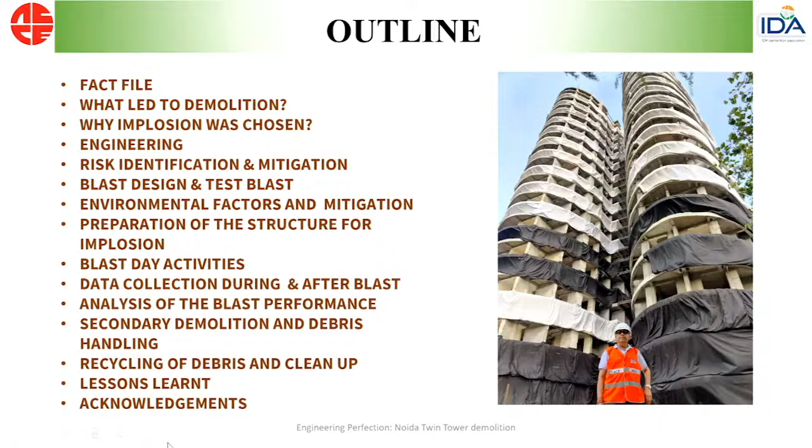This is a very critical part of our approach to demolish it - the way to prepare the building, data collection during and after the blast. This is interesting - what data we collected and how it was done.

As a consultant, how much do you give the market? But I made some critical review analysis. You're going to take away some secrets - data collection and analysis of the blast performance.

And clean up - this is important because we created a mess, and what as engineers we need to do, and acknowledgement of course. That's just to check if it works.

Know the history of this - read as we read through, as I show. These are the two towers we are talking about, which here it says tower 16 and 17.

Apex and Ceyane were the names given. The main reason why the Supreme Court gave the order - mind you, all of these buildings are under the same developer. They filed the case in 2009, somewhere it's there, floors which were not in the original plan.

These were given sanction from 15 to 20, 20 to 30, 30 to 40 floors, mostly from government organizations who promised, and they thought they'll have a good outcome. These two towers were unauthorized, but there was accusation.

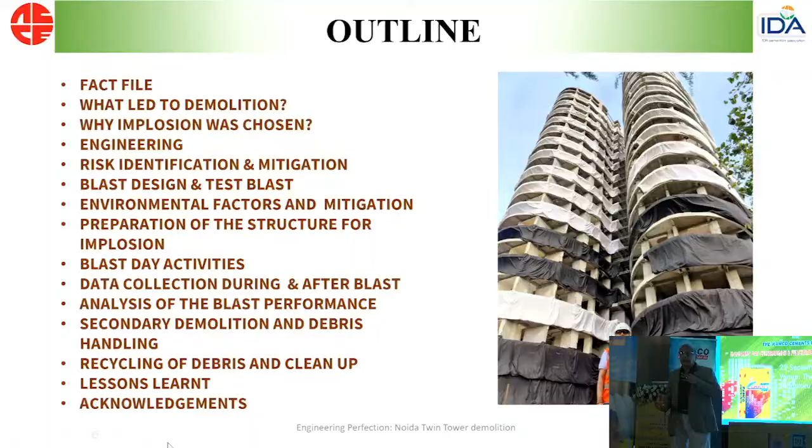A lot of them died during this 2009 to 2021 journey - they were all retired, so a lot of those who fought were no more to see the victory. You can read the other two.

So this is a clear case of the association putting their foot down and saying what was not sanctioned in the initial plan, you cannot build. So this is what the case was all about.

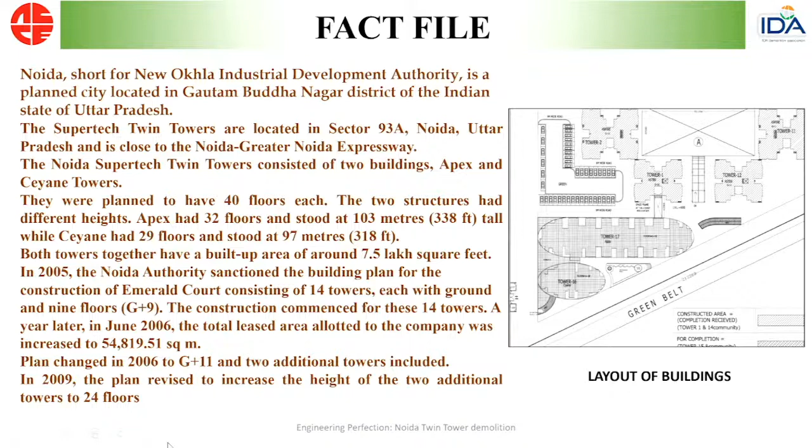In 2012, you can see the numbers, our flats were booked, advances taken, and all of them got their money back with interest. So in 2021 August, nearly a year ago, the ruling was given, and it was obviously fought by the developers. It was fought, but they took notes.

It is your job to get it done also. So in August, a very clear Supreme Court ruling was given to the Noida authorities. They mentioned that whatever method is chosen for demolition, do it in any method you want, but within the time frame.

So that's how I was involved. In the last paragraph, you can see that an agency has to get it done and get it approved by Edifice and CBRI. There was a team where others did not have demolition expertise. Edifice Engineering was the contractor, a company in Mumbai, and the Supreme Court was involved in giving the ruling, and they put their foot down that it has to be done.

Again, I had to justify, go to the site, see the progress and all the difficulties they have faced. I'm going to explain why the extension of time for this contract was also given by the Supreme Court, and it was executed. This was the main team in the beginning.

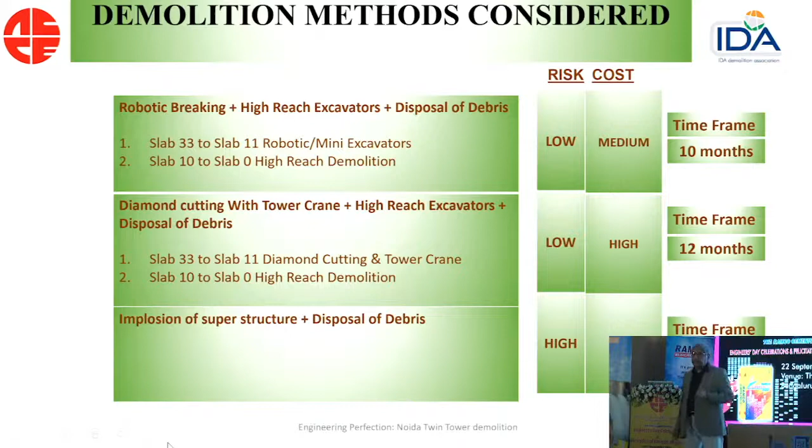Now, when it comes to this, what are the options for demolition? It has to be done by this date, and whether it's doable, there were three choices here, and then you can look at the level of cost, time, and risk. These are the three vectors, because this is a 100-meter building, and we need almost double of what we will use, and beyond this it stopped.

So the first method, from top down, very low risk. Once you hoist the machines to the top, and you're working from the topmost floor. So that was not a problem.

That's a slow process, and the third method was using explosives to implode the building, given the amount of work involved. This requires a lot of experience with this kind of building in India. So last year, after a lot of deliberations, this method was chosen.

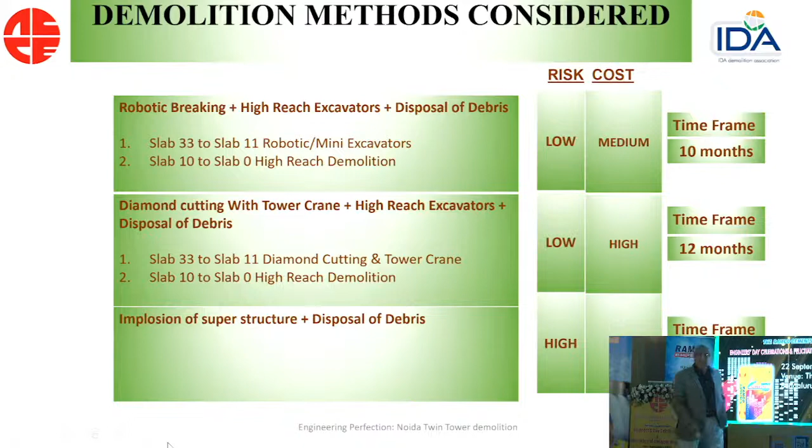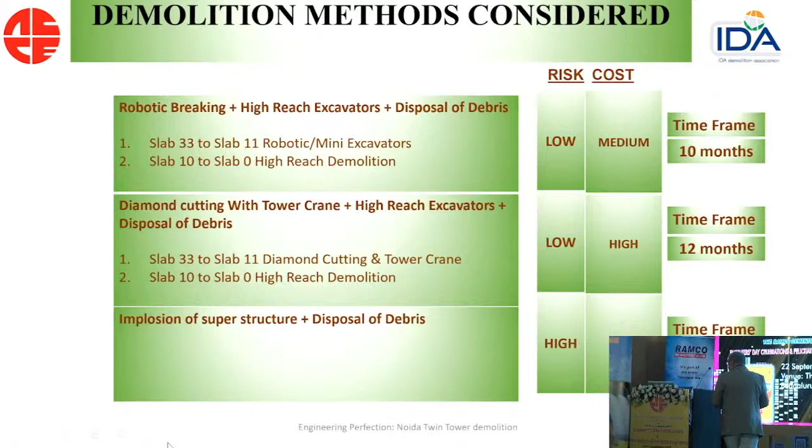And that is the reason we brought Jet Demolition, because they are experts in explosive demolition. So my contention is, even with the other method, using machines, we can do it, but it will take 3 years.

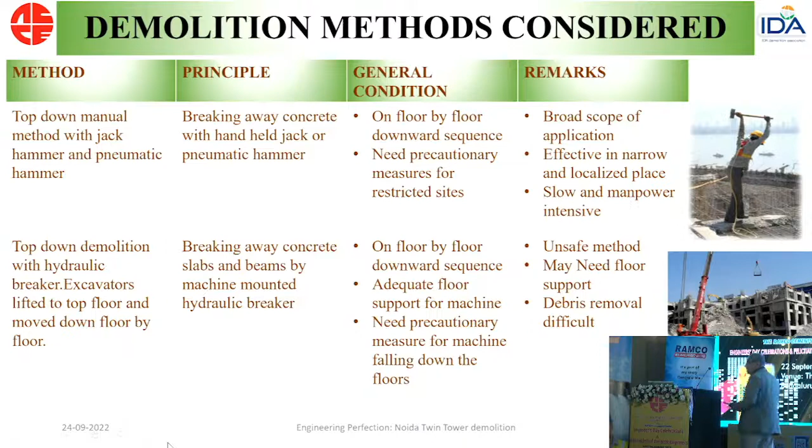Here is a multi-storied building, and if we started demolishing from top down, it's a very risky method, but it could have worked. So we considered some other methods, high reach, tall machines based on excavators, with their pros and cons of cost, time, and risks.

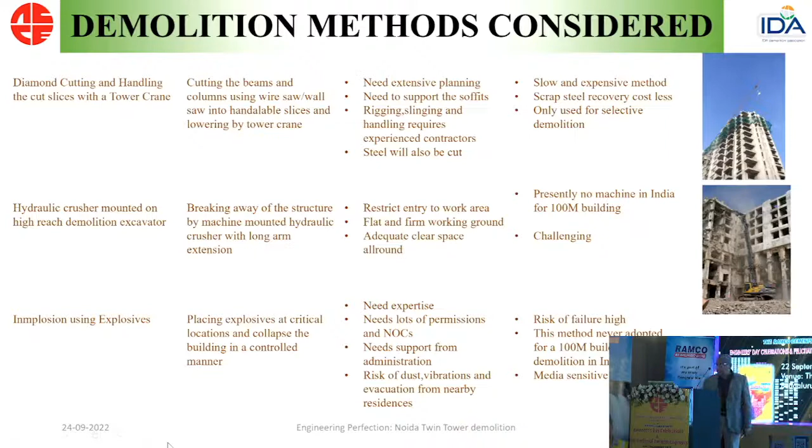And the Noida authorities finalized the bottom line, with both companies, Edifice and Jet Demolition. We had cases where buildings were demolished and had tilted, and the structures failed. You will find hundreds and hundreds of such examples.

So we had done this in Cochin against a Supreme Court order, very successfully. For us, we need gravity, we can't go and do it if we have to displace anybody. There were no families there.

And it's the shortest duration possible, with the capability to check at every stage before the collapse. What about the gas pipeline? I will explain when I show that.

Fast execution, safest and economical. So in the field, at the site, this can be done successfully, without a failure.

This is a do or die situation, no second chance. It always happens in an industrial atmosphere all around, so can we handle this dust? Can it be controlled? There were cases where two people standing far away, 200 meters, 300 meters, got hit and were killed.

So we have to make sure that this doesn't happen. People are always watching, and somebody wants to go very near with his mobile camera. If he is hit, we are finished.

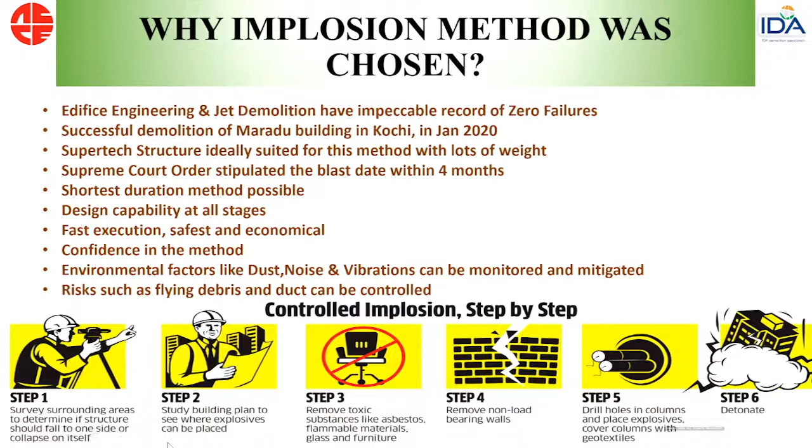So this kind of risk is a media connected event. Now come to a chapter which none of you will know about. Just like any other design, like structural design, doing finite element analysis, doing modal analysis, taking material properties, it's exactly the same process we do, but in a very short timeframe.

The basic principle of the implosion is based on various theories of structural collapse due to earthquake. Especially if you look at stilt column buildings, the stilt columns get weakened, and this is exactly what we will do, then we blast the columns and weaken the building.

Because otherwise they will not let it happen. So the implosion design called for selecting columns, selecting the floors, and selecting the columns in that floor, which is very difficult. So this is the tower I will explain - this is one of the towers, where these are the primary blast floors.

In this secondary blast floors, the last basement we did not touch. No, this is the ground floor. This is the first basement.

Up with debris for cushioning, plus these. It is sitting on piles, and we wanted to give a chance for the piles to be reused and not damaged by the fall. So we have blast floors, primary blast floors, secondary blast floors. And these are what are called the impact cushions, which I'll explain later.

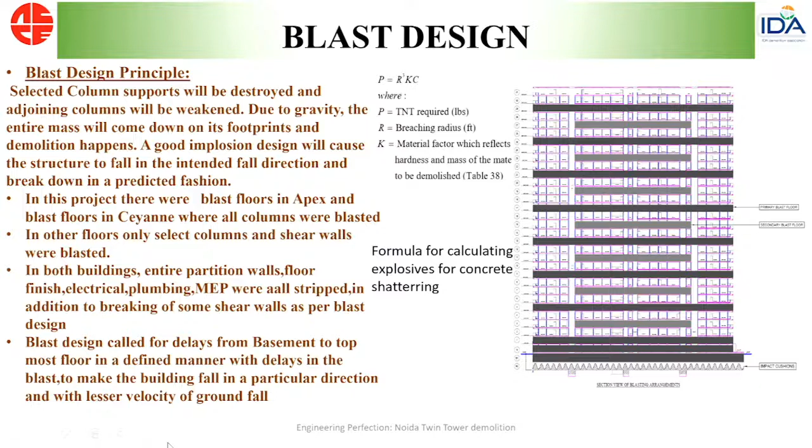So this is the blast design calls for delays from the basement to the particular direction. When I showed you, the first movement has to come. So these are the primary blast floor, secondary blast floor, which I explained to you.

And then we had put steel containers, 20-foot steel empty containers, as a protection. Containers will prevent some damage to buildings. Similarly, this is in the plan.

In this direction is where the blast will happen. So we have to pull this building as it falls in this direction. The columns, it's 0.9 seconds in the 33rd floor.

So this blast design progresses both in the horizontal direction and the vertical direction. But when you see it, you will think it's just one blast between one line to other line. So the blast design calls for effectively blasting in this sequence with a small delay.

From here to here, it's 1 second. So all these things also have a delay. It pulls the building - I know this will be like this.

The debris after it collapses - this is the GAIL pipeline. This is the main road. This is where containers are kept, protection for that building. And this is the footprint of what we and earth berms. This is the gas pipeline.

And GAIL - we had to get clearance from GAIL, NOC from GAIL, because they were running the pipeline and they would not shut it down. It's a pressurized gas line, a main feeder or something, they said. So you can imagine we are blasting near a gas pipeline - how much of involvement and limits of what the API codes are.

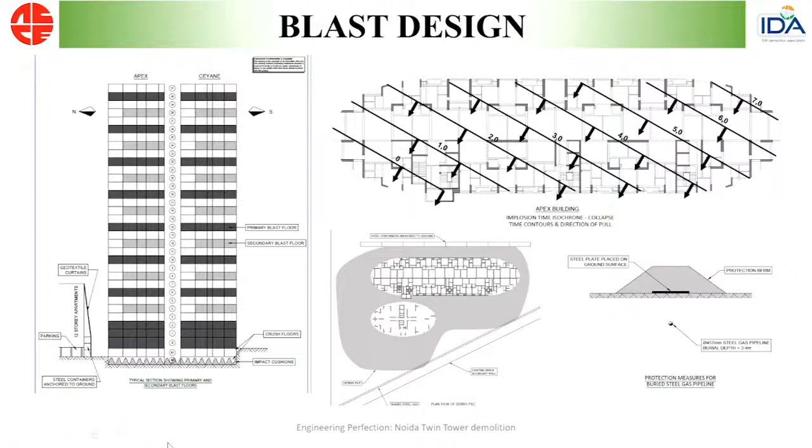They agreed that some protection of this sort would be done, and it was done. And mind you, everything was measured. Every single parameter was measured.

We only touched the shear walls, lift walls and shear walls, almost 20%. Here we are very careful. We had a structural engineer who works with JET, worked with us, and so he had to check after it is weakened. That risk was important for us, that we are going to remove a floor like this.

So these red ones came to me - I'm just showing one, a typical way we approached the engineering science behind this. And it was not just one shot. We went through several iterations and changed these locations to make sure the final stresses on the columns are safe.

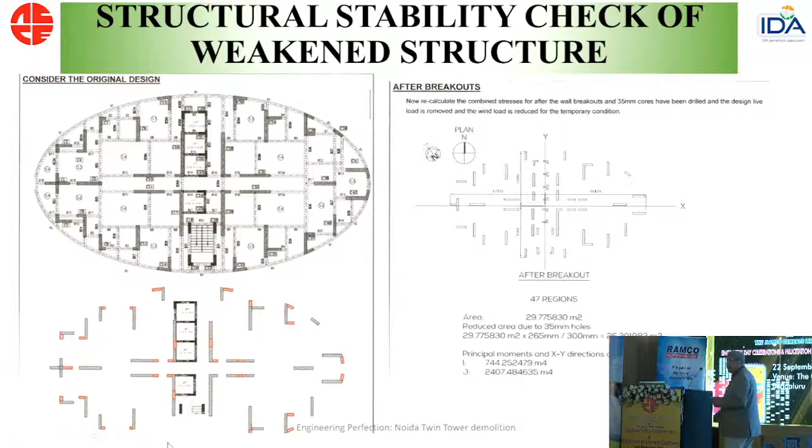And CBRI was our watchdog. They had verified everything.

We had a company from UK who had predicted the vibration levels here. And all of you know that the vibration levels in an RC structure - we can allow up to the peak particle velocity to be 25 mm per second. But this is okay for a normal structure. Here we wanted to make it a little tight, so we allowed only 20.

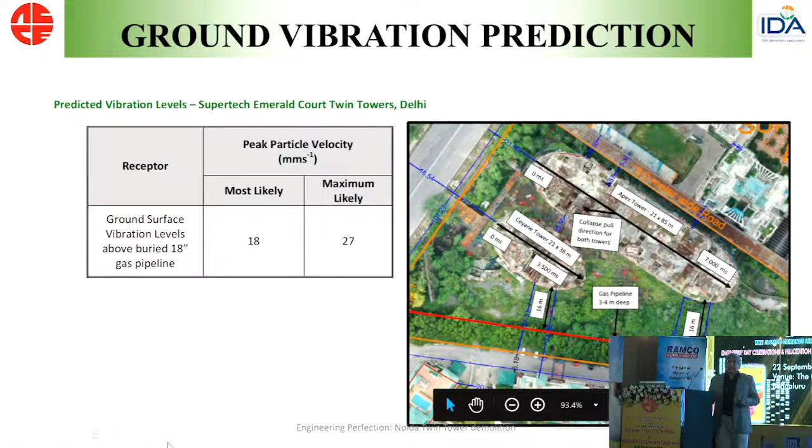And this was predicted before we did the job - it could be 18 to 27. And with the blast, if one blast overlaps the other, the peak particle - the waves, and the stress wave propagation in the soil - and there.

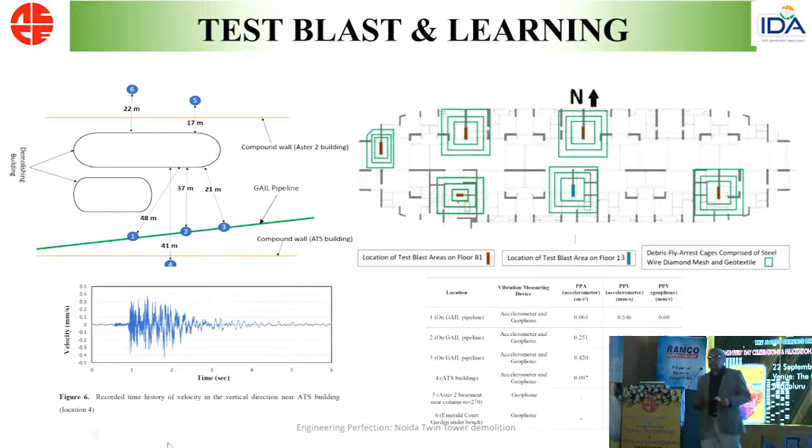So how do we verify all this? This is all theoretical, so in such important projects we do a test blast. Whatever we assumed - the powder factor, the kind of explosives, amount of explosives - based on the basement, column B1, these were basement columns in the existing building, actual blasting.

From the analysis, we knew that removing the five columns at the basement level, loss of support will not harm. So we became daredevils and took the risk of removing those loads, making it zero, to see what happens. We tried this on the 13th floor, and we had also predicted to contain the blast energy. This was projected and done on 6 test columns.

So the test columns were taken, and a test blast was done. Geophones and accelerometers were put to measure the vibration - to measure whether it will work or not was the test for us, on an actual building.

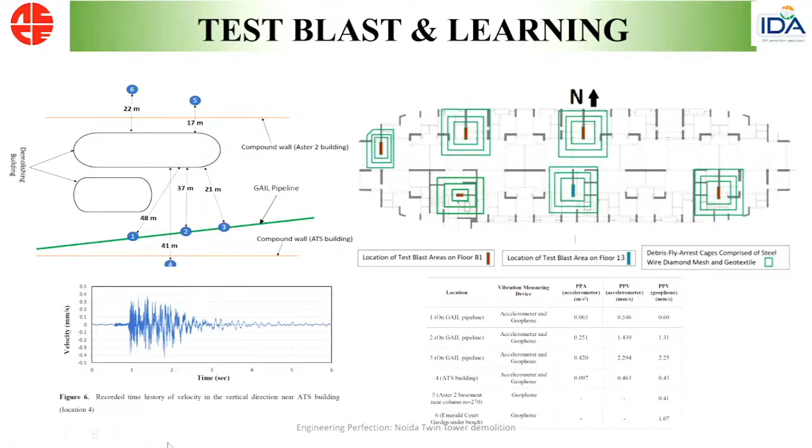And we got the results here. This is the actual vibration record near the ATS building - results on the vertical velocity. Accelerometers and geophones were used, both vertical and horizontal.

So the biggest data for us was vibration - okay, it's an external factor, but the biggest factor is the actual columns. This is the basement column, we have to increase it, and the level - I welcome you to read this while I talk.

Here is the result of the test blast. Before the test blast, we had 8,300 holes. After the blast analysis, it became close to 10,000 holes to be drilled - a 19% increase. Total meters for holding the debris, not flying out, increased by 50%. The number of primary blast floors also changed, as shown earlier, to 3.4 tons.

And the number of days to charge also increased. Days to charge means once all the job is done and everybody goes out, then the explosives are charged. So the stirrups were designed so that they don't hold, and the main vertical bars are allowed to buckle - we wanted them to buckle.

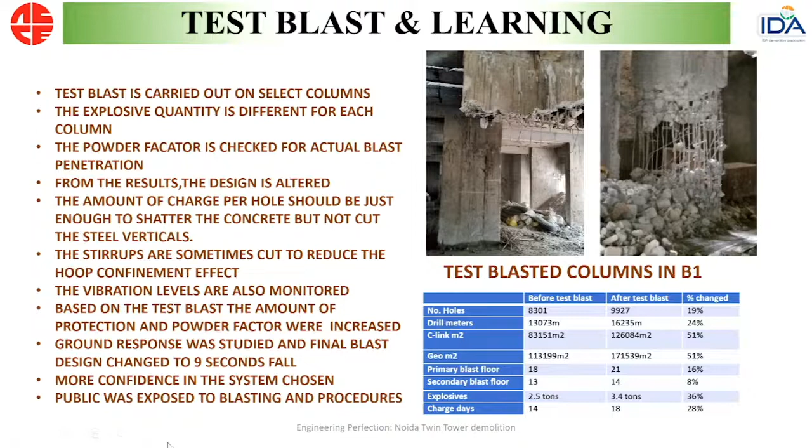So we went through blast sirens as we have workplace risk and disaster management protocols. This is the exclusion zone - we had a 250-meter exclusion zone, meaning nobody within a 250-meter radius should be there on the day of the blast, a few hours before.

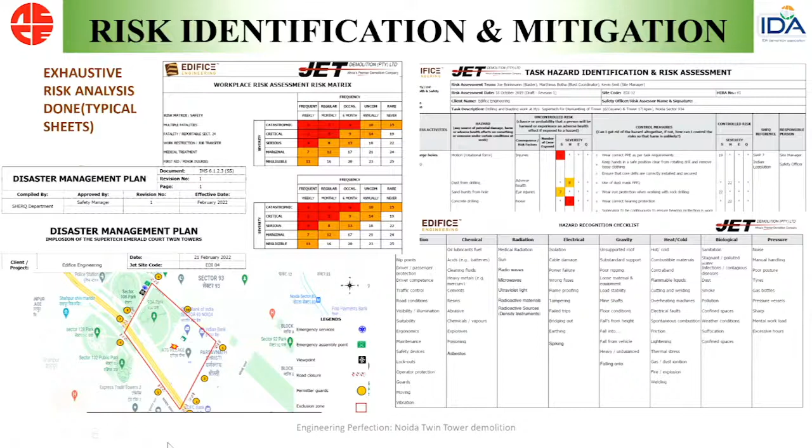So this sort of exhaustive risk analysis and mitigation was done and it satisfied us, because it is not for anybody else.

Is dust a big issue? Of course, we had air quality index meters. The Pollution Control Board had set these up, and in half an hour it's a live map with the Government of India - we are following that. So a lot of other factors were addressed.

To a certain level we had identified them - it doesn't come as a missile, and with 250 meters nobody there, nothing will happen. But still it can hit a glass, it can hit something, so they vacate. All the cars were vacated.

5,000 residents - we cannot say there will be no collateral damage, there could be some damage. His claim was less than 2 lakhs.

All the emergency services were in place. No fly zone - even the ATC was informed. Because the government was involved, as the Supreme Court was involved, we could do this. ATC was asked to stop overflights for 1 hour. 5,000 residents vacated, with a 250-meter exclusion zone.

Then at the site, rubber tires were cut to soften near the road - initially we thought this wasn't required, then we put this around the building in the fall direction. Geotextile drapes - you can see in the next picture - were put on all nearby buildings, like hooding them completely.

You can see how these guys are doing this - a straight fall of 50 to 60 meters. They go around putting 6 rounds of chain link fencing, tying it, then come back with geotextile, 6 rounds on the selected columns which will be blasted.

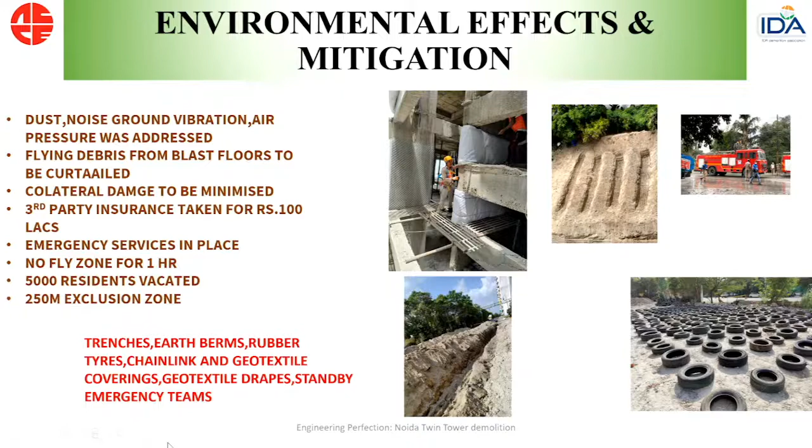And of course, the government had about 20 fire engines and 10 ambulances. So these are what I've told you already - some pictures showing how we prepare the columns. First the holes are drilled, then the explosives are placed.

Dust suppression systems were in plenty of use, along with trenching, and this is how it looks before we put the actual charge. The neighboring buildings were all covered with geotextile - this example is not from India, it's from South Africa, but shown in a similar manner to explain.

Drawings were prepared showing which are the buildings, where are the barriers, and the connecting corridor. The basement is connected between these two buildings - this is the existing building, and this is the building to be blasted. We removed the basement completely to cut off any vibration, and we'll rebuild the basement slab.

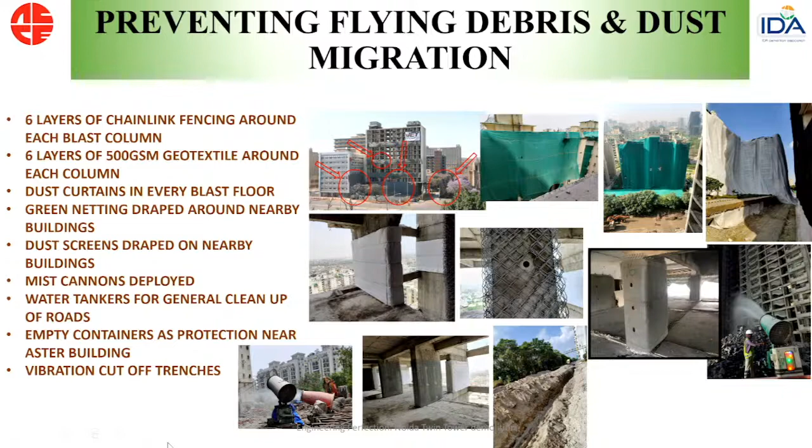Now, to prepare the building, we need to prepare the building to weaken it. When I say prepare, I mean weaken the building to take the blast. Cubic meters.

Total number of holes is 9,642 holes, 17,000 meters of drilling, 34 mm diameter, about 20% of the shear walls.

So the jet demolition people come and mark like this in the entire building for knocking off, for removal, and the team comes and removes this. Otherwise, it's very difficult to monitor in so many floors, in so many locations.

So these are very clearly marked in the drawing, and then on site, 34 mm extended drills, hundreds and hundreds of drill bits were used, diamond core drilling. These are the diamond core drill holes going straight into the shear wall.

We have 25 machines like this working, and the total man days amount to about 45,000 man days over 6 months. It's 3 lakh square meters of chain link and geotextile.

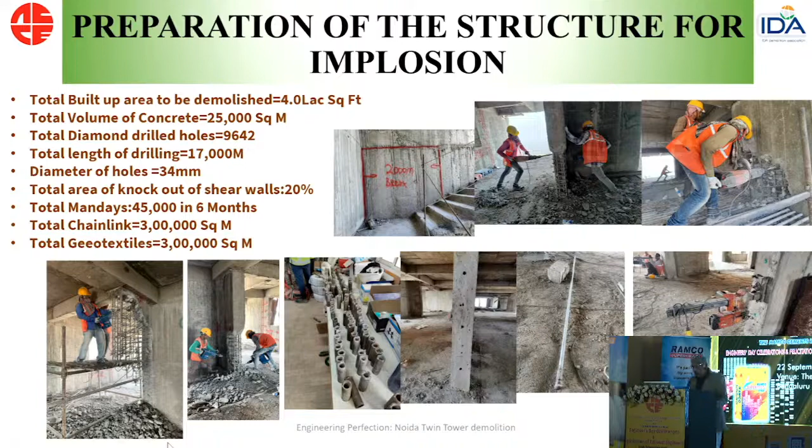It's a huge amount of BOQ. Machines - it cannot get done without machines. You can see we had mini excavators, skid steer loaders, 20-ton excavators, hand chippers. The list is here.

45,000 liters of diesel used, and 15 containers, total explosives 3,700.

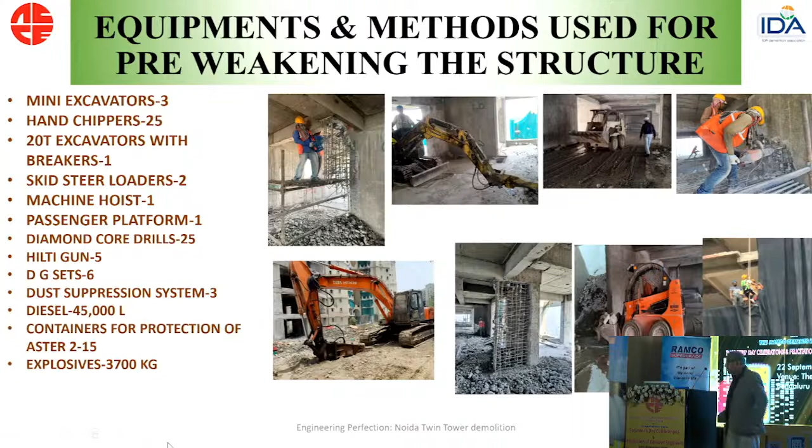Now coming to explosives, we use 100% Indian-made explosives, a company called Solar, to handle, and we had the shock tubes. These are shock tubes. These are cords, and this is how it looks after it's done.

After the columns are wired and explosives put inside, actually nobody is allowed in. Only their team goes in.

For pigeons to go away, we had special dog catching in the last 1 week to take away all the dogs and cats. Why? Because they can go and trip over these wires. So every single detail was taken care of.

Just for this system, emulsion explosive was used, with shock tubes and delays.

Unexploded holes - you saw these holes. If it's unexploded, then nothing will happen. It cannot be blasted unless you connect an electric dynamo to that, which you need to bring in. So other systems are a little bit risky. This is a much safer system.

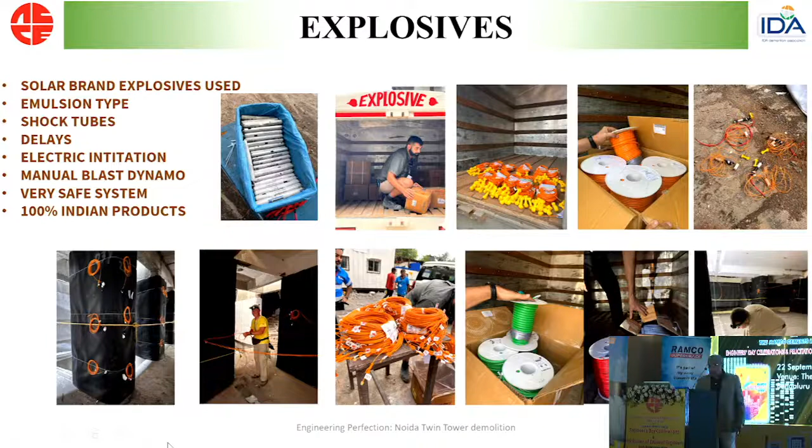And 100% Indian product. For nearby buildings, we do a physical survey, map the cracks and existing defects, and also do model analysis. 3D model analysis was done and vibration magnitudes were given. These are the inputs for the vibration analysis of these buildings.

And so engineering study, detailed survey was done for Aster 2. The most sensitive building is 9 meters away.

And after that, extensive retrofitting was done to that building. So that building benefited because we extended its life by retrofitting it completely.

All the tests that you would normally do for NDT, and core samples taken to study the stability of that building and of the nearby buildings, not just one building.

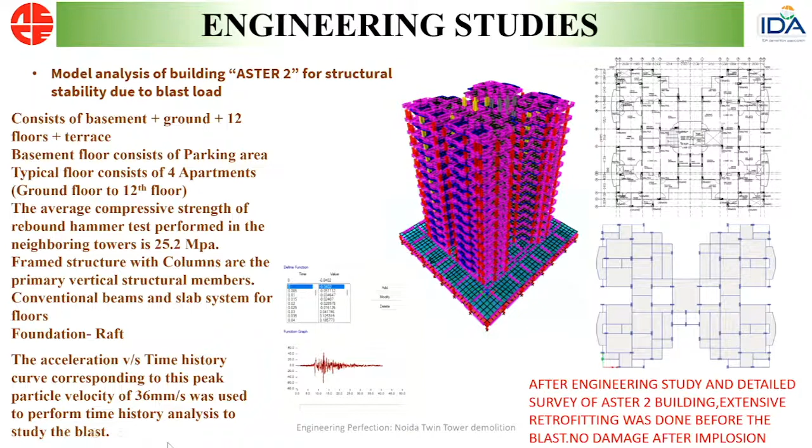I'm not showing the videos and the animation of this.

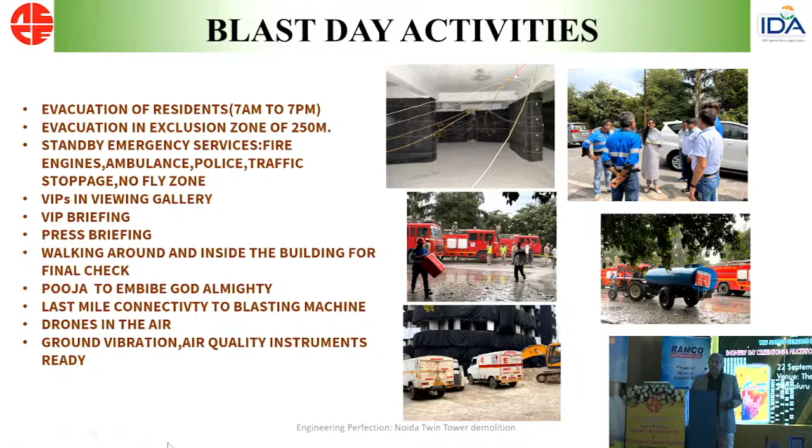Flying in the air - ground vibrations were all monitored, air quality, pollution control board, ground vibrations with IIT Madras with almost 10 geophones and accelerometers. So everything was done on the blast day.

Here you see I'm doing the puja and explaining to the invitees. Some of them are from top companies in India, explaining. We took them inside and explained what they cannot see otherwise.

And then this is the viewing gallery which we watched from. And this is how it looked, very silent. And this is from our viewing gallery in the neighboring building, quite far away.

So all of you should have seen this footage. So I will just run through this footage again.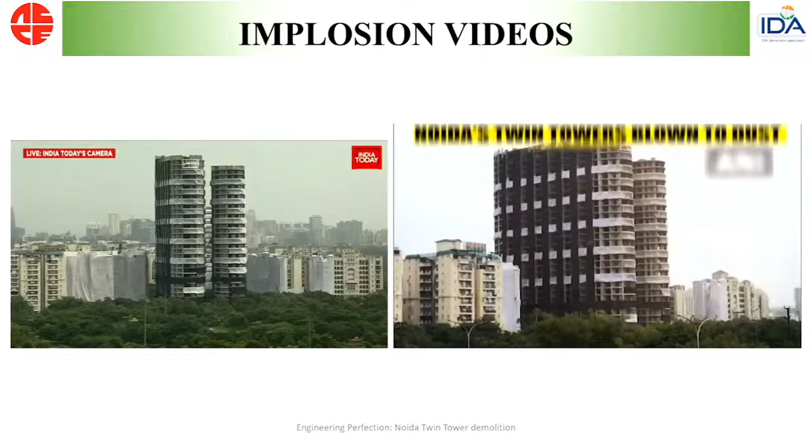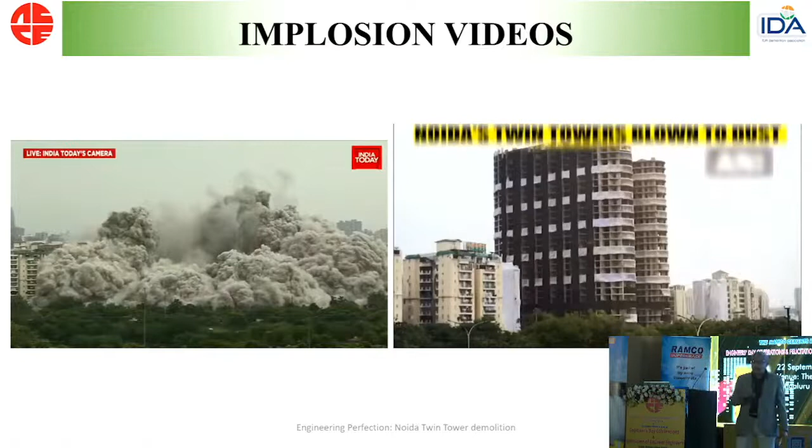So this dust, I was there for 5 minutes, half an hour. 2:30 was the blast till 3 o'clock, and after 3 o'clock all the dust settled. Actually what happened was we were monitoring the wind direction, and we thought the wind was going towards us, so we didn't have control. But still, after 30 minutes, there was no dust seen from the top where we were standing.

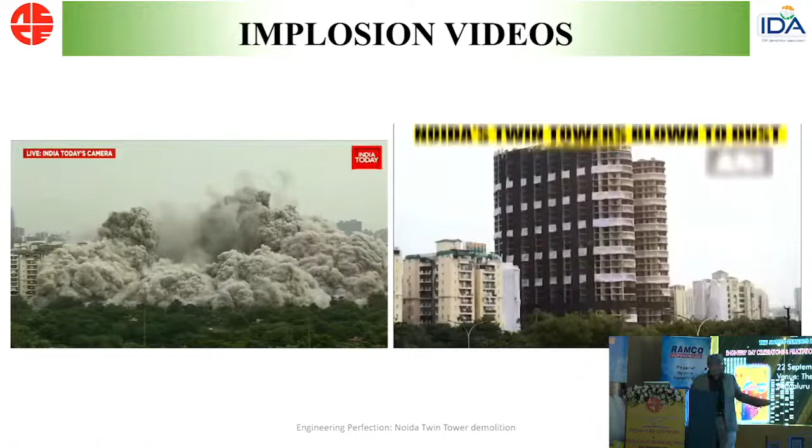So for want of time, I'm not playing the whole video. You must have all seen it. There is a similar video also from various angles. I have all the data analyzed till now. A few data I have, I'll share with you.

So here this is Dr. Anil Joseph from GeoConsult, and then we have accelerometers from all the stakeholders. This is collecting data, and this is the black box. I put a red sensor inside the building, put by CBRI, and we recovered this. What you see here is these boxes were indestructible. They were collected from the debris and handed over to them. So they use the opportunity like a field research. One day I will publish a paper with all this data, everything properly.

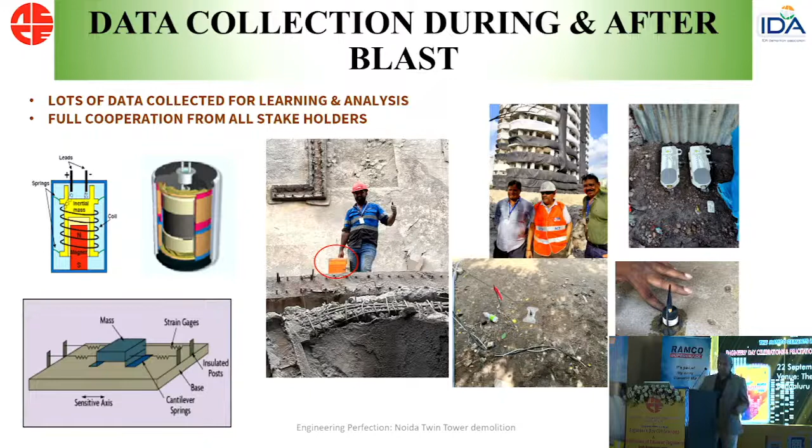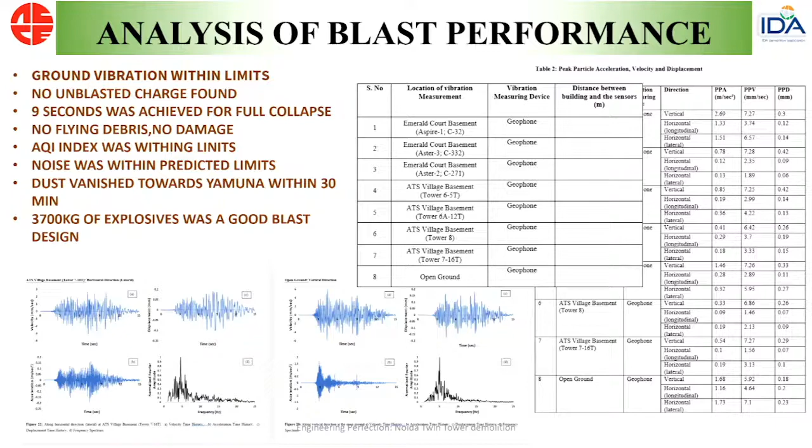Displacement - these are the actual curves which I got from IIT Madras after the blast, all within the limits. You can see here what we are looking for in this data. The highest here is this. So this is the analysis. 9 seconds was achieved for full collapse, no flying debris, no damage. Pollution Control Board published the air quality index immediately within 1 minute. It was a good blast design.

For want of time, now critical performance review. Everyone knows it's a success, but for me, it's not a success - it could have been better. I just put some points here. Vibrations are within limits, we know noise. This portion went away from our expected line.

Top 3 floors of both the buildings came down. I don't think anybody has seen this except you and me, and of course our team, when we analyze critically. So this, I would say, could have been better. This is the close-up of it. Can you switch off the lights? This close-up of 3 floors in both the towers - I would say it's on me.

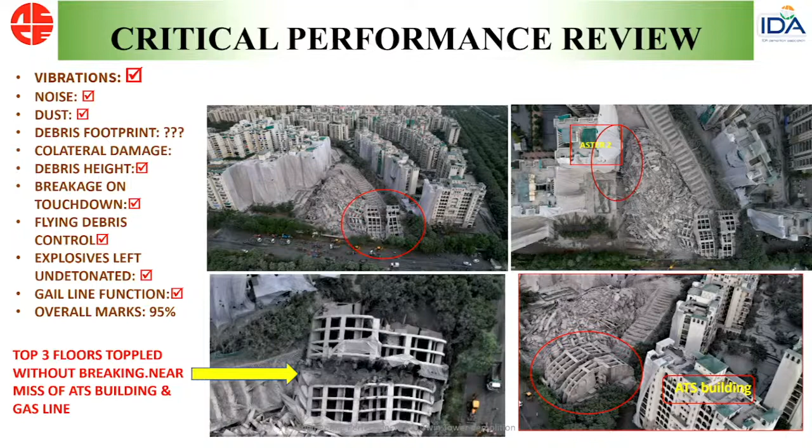But yes, this is amongst engineers. I feel secondary demolition is going on right now. It will take another 3 months - 1 month is over, 2 more months.

So these are the usual machines being used, and recycling and cleanup here. The material for the contractor is being sent to the Noida C&D plant. Of course it's a very small plant, cannot handle it, so only partially it's being recycled. I will not spend more time on this - you can see the pictures, very self-explanatory.

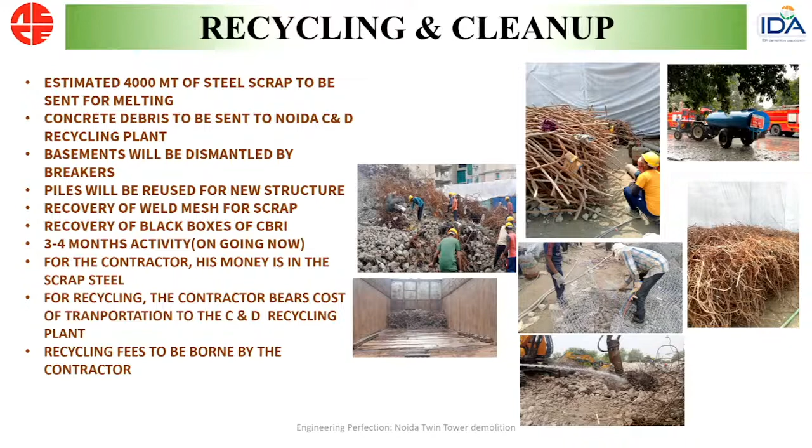This is the last slide. 3 recent demolitions of illegal structures have reinstilled confidence in the Indian legal system. Here, this is Noida. They are bleeding - blood from their eyes - because old people, some of them died, and their life savings were lost. All rejoicing today, even careful when they invest in this sort of thing.

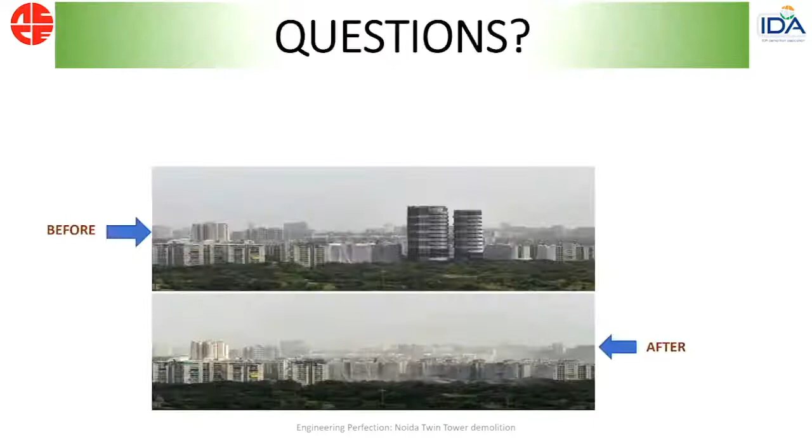This is a promotional video by Edifice - I'm not playing it. So this is before, and this is after the implosion. And I wish to thank Edifice and Jet Demolition.

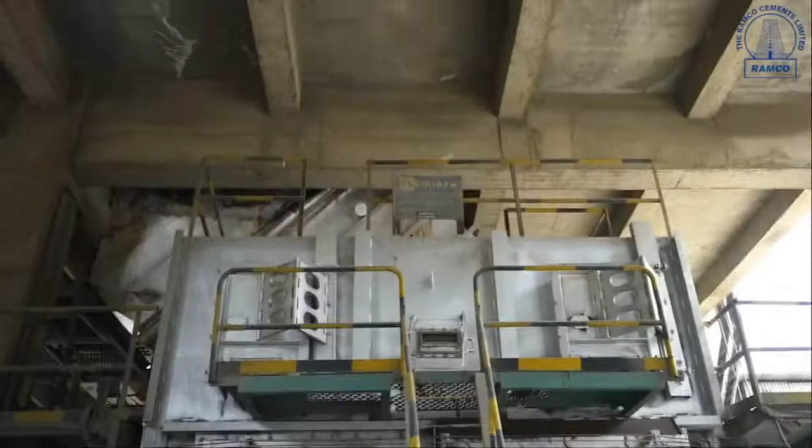Invitees, greetings to all who are present here today. I, Srinivas Chakragiri, on behalf of ACC, welcome you to the celebration of Engineers Day. I welcome you all on the occasion honoring Sri Mokshagundam Visvesvaraya, recognizing contributions in the areas of industry and profession.

To promote friendship, establish rules for professional and ethical conduct, and to mark such an event.

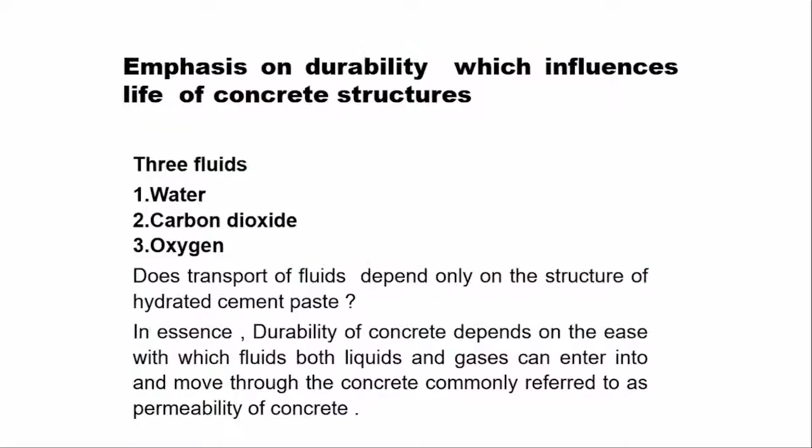The test needs to be followed to ensure the service life, basic fundamentals. All of us know durability is affected by the concrete. We have a whole lot of this. So that is the basic fundamental premise on which we all look at it. Durability is also given importance.

But the fact remains that based on the requirement, the permeability test is where the concrete specimen is checked for water penetration, which again relates to the concrete. If the amount of charge that is passed is more, it affects the concrete.

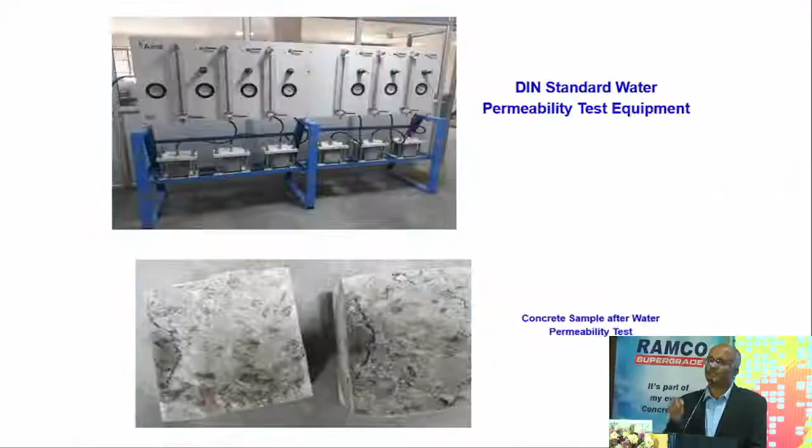If the amount of charge that is passed is more, the concrete durability is lesser. If the amount of charge passed is lesser, you have higher durability. This is more popular to evaluate the durability, because of the pollution and the action of carbon dioxide on concrete. In this test, what happens is the durability of concrete is assessed.

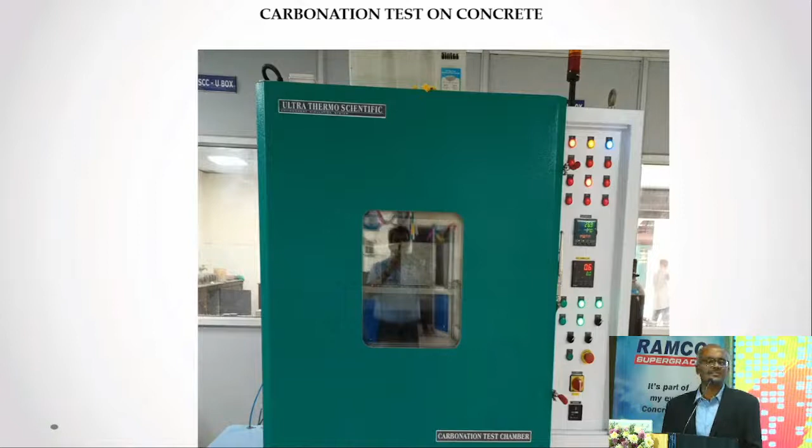Now, as all of us know, the major challenge that we face at site is the incidence of cracking. Cracks can occur due to various reasons, but there are various tests which again tell us whether a particular mix is prone to cracking.

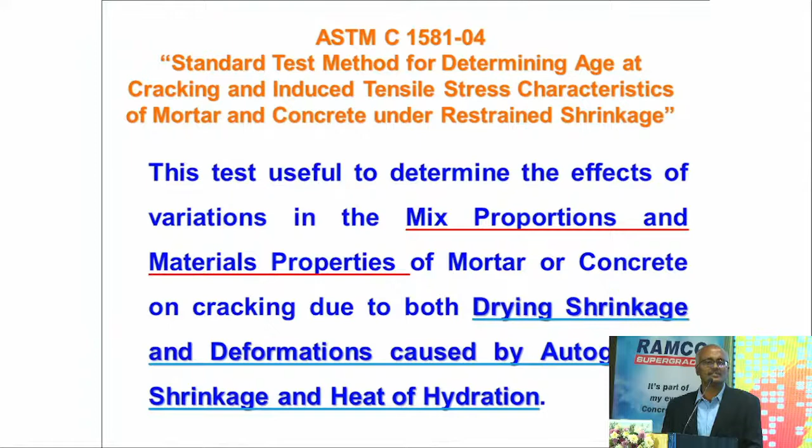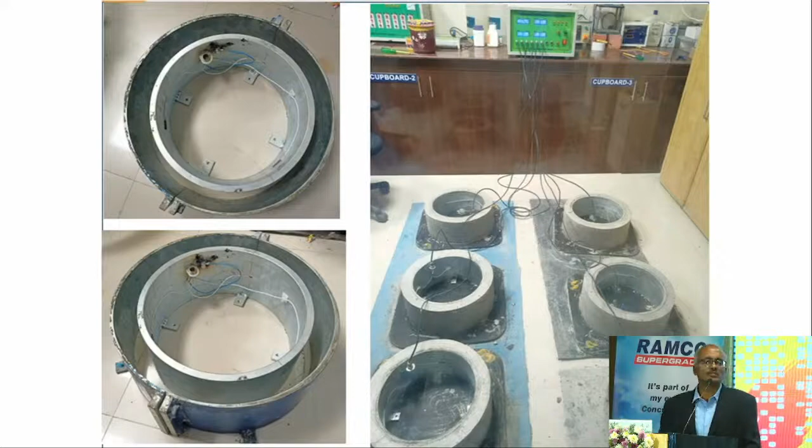One of the tests that we look at is a drying shrinkage test as per ASTM C1581-04, which we call the shrinkage crack ring test, wherein we have a particular specimen and mold. The concrete is put in this mold and then, by virtue of the deflection, we see whether it is prone to cracking or not.

We have all these tests at our research center because many consultants and construction project sites would like to know how the concrete mix behaves as far as durability is concerned. Even cracks can be studied by introducing a particular temperature or humidity in a room, then casting a small slab and seeing for various proportions whether it is liable to cracking, because shrinkage cracks are one of the most common problems faced at the construction site.

Ramco Research Development Center has all these facilities for durability of concrete and testing of cement, and we also look at economical mix design, because many projects look at how an economical mix design can be done. That is where we have been able to bring out various cement variants which help in economical mix design.

Various exposure conditions, various applications - as all of us know, exposure conditions also play a vital role as far as durability is concerned. So based on the exposure conditions also, we need to look at the concrete mix design.

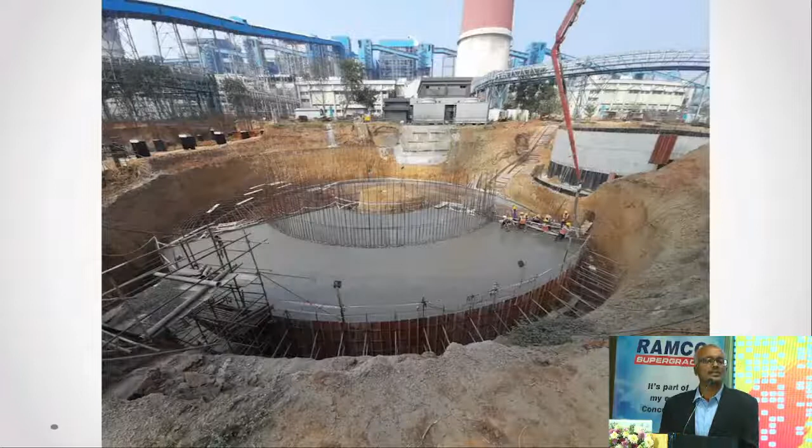Again, in mass concreting work, you have concrete temperature, which is very critical because of the surface temperature and core temperature - the temperature gradient. Many projects have gone in for ice flakes to control the concrete temperature and see whether the temperature gradient is controlled or not. So there are so many permutations, so many requirements as far as concrete structures are concerned.

Various projects, various states we have been involved in, various construction companies with whom we have interacted - based on that, we have been able to customize cement based on the application. A data bank of various concrete mix designs is also available with various admixtures, which talks about all this, and then we need to fulfill all that.

Now coming to non-structural applications. If you look at non-structural applications, it is different from structural application. Taking an example of Ramco Super Plaster, we recommend it for all non-structural applications, whether plastering or brickwork. The kind of parameters required is different from cement used for concreting works - you have something called air content and water retentivity, which is very important for plastering or brickwork.

Because the ability to spread over a larger area - the coverage area has to be there - and the mason has to work comfortably, that is very critical for plaster. The ability to adhere to the background surface also matters; different backgrounds, again, the plaster may behave differently. That is where the pull-out strength plays a vital role and gives us an idea.

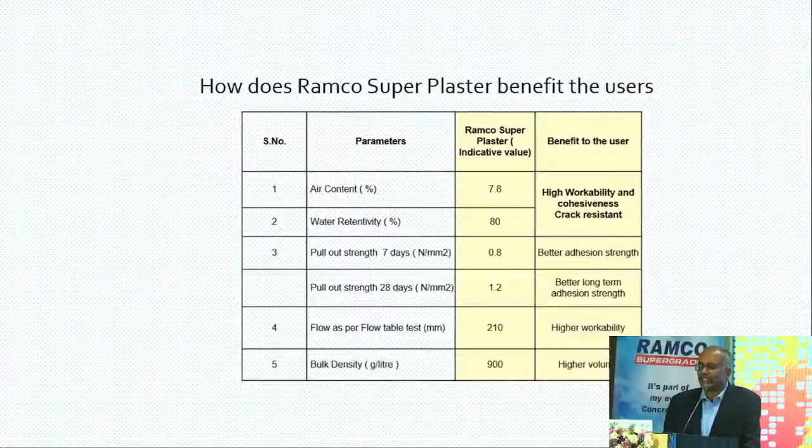If you look at Ramco Supercrete, this is being used for concreting. For a major nuclear structure, they had a specification wherein the cement had a lower heat of hydration and at the same time a higher rate of gain of strength. That was the requirement.

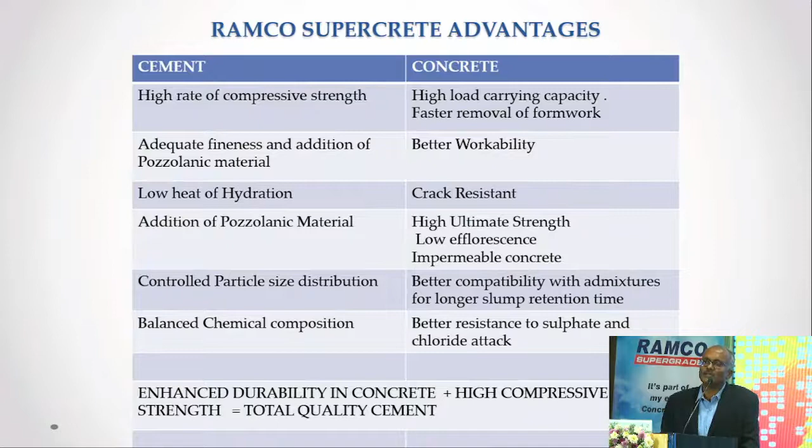The moment we saw that requirement, we asked them whether they need a PPC cement or an OPC which gives low heat of hydration as well as a high rate of gain of strength. That is what we have been able to give to the housing sector for all concreting works, whether it is columns, slabs, or beams, which gives the required performance parameters at site.

Of course, precast items, all of us know various plans. You have a number of hollow blocks, solid blocks, fly ash bricks. Then we have the organized sector wherein AAC blocks are also there. So numerous precast applications are also there.

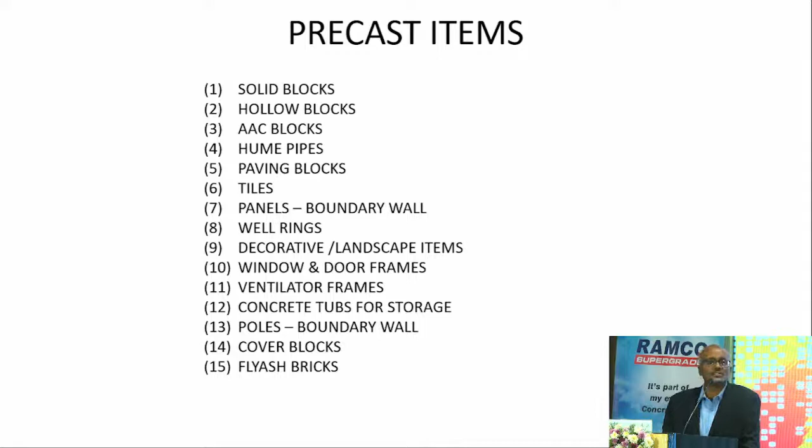To cater to this segment, we have a special type of cement, Ramco Superfast, which looks at the rate of gain of strength. A higher rate of gain of strength is what is required. So we studied the process of various precast manufacturers and worked along with them to see how it works.

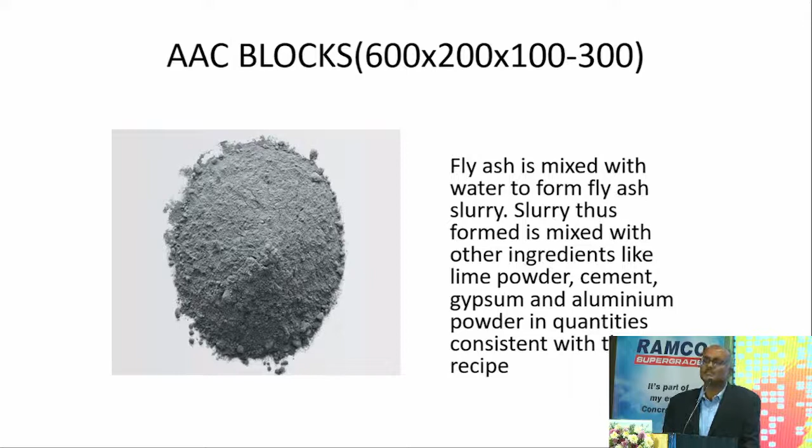AAC block, as all of us know, is a combination of cement, gypsum, aluminum powder, and the process parameters needed here would be different. The rate of gain of strength is what is defined here.

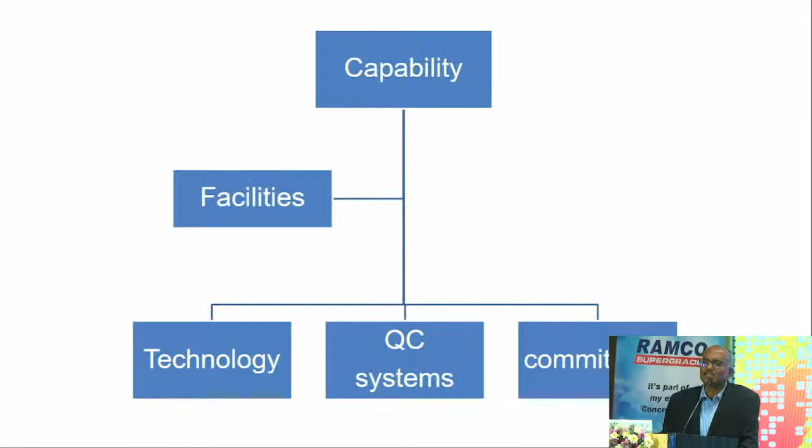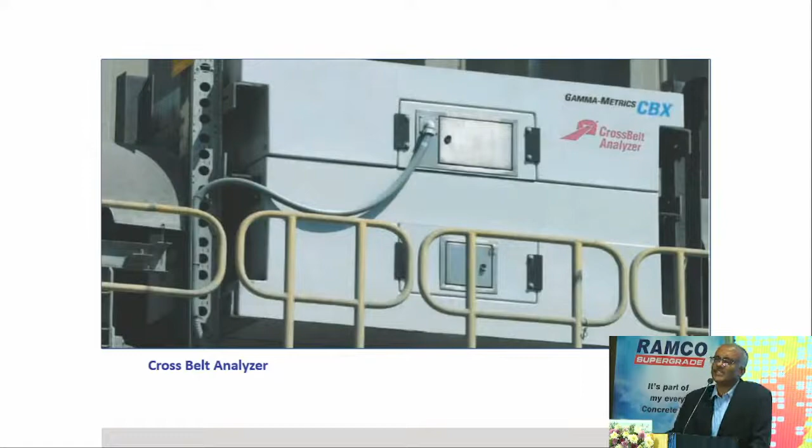So precast panels and components speed up and accelerate the construction work. Of course, the capability, the facilities, the technology, the QC systems, the commitment to quality that we have in the cement manufacturing process, ranging from surface miners to the vertical roller mill to the cross belt analyzer, which analyzes the raw materials as it comes in on the conveyor belt.

Many of them are new centers that have been coming up, so we get to learn a lot of things. We thank the office bearers of the Association of Consulting Civil Engineers for helping bring out an optimized solution which is of huge benefit.